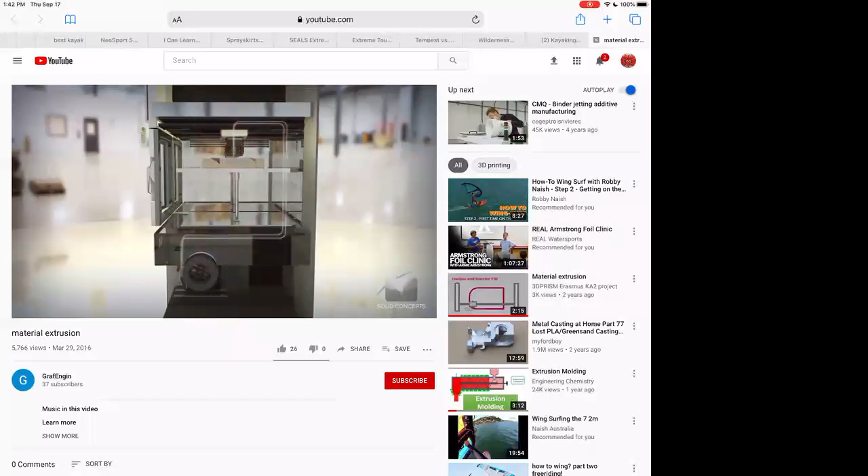The FDM process begins by slicing 3D CAD data into layers. The data is then transferred to a machine, which constructs the part layer by layer upon a build platform. Thin thread-like spools of thermoplastic and support material are used to create each cross-section of the part. Similar to a hot melt glue gun, uncoiled material is slowly extruded through dual heated nozzles, which precisely lay down both support and thermoplastic material upon the preceding layers.

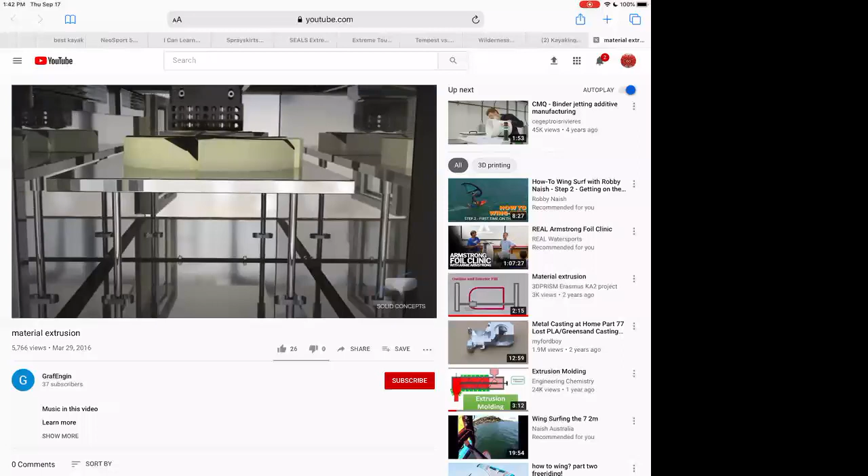The extrusion nozzle continues to move in a horizontal XY plane while the build platform moves down, building the part layer by layer. The finished part is removed from the build platform and cleaned of its support material.

Raw FDM parts have visible layer lines. However, service providers such as Solid Concepts offer multiple finishing options to create smooth, even surface parts, including hand sanding, assembly, and cosmetic paint. Since FDM parts are constructed with production-grade thermoplastics, including ABS, polycarbonate, and Ultem, they are both functional and durable. FDM is utilized in a number of industries, including aerospace, automotive, industrial, commercial, and medical.

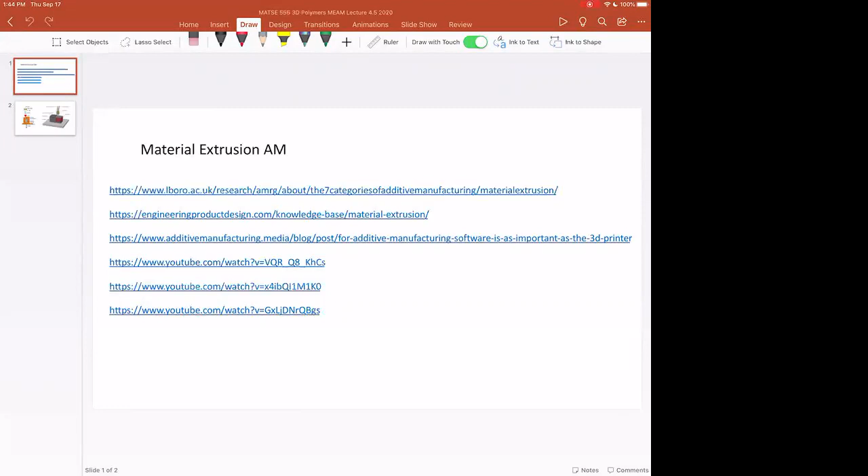And we'll do this for SLS, we'll do this for stereolithography, we'll do this for high-speed sintering and binder jetting and others. But if you haven't seen a 3D printer live, YouTube is a good resource. If the labs ever become public again, we have a lot of these printers in the labs, or you can ask one of your friends for a tour if we can get guests into the labs again. So I just wanted to make sure that everyone's on the same page.

And so the idea is that you have to build a three-dimensional solid part showing something like this, but you can only do it with this nozzle tracing each piece of the part and then having layer by layer buildup. And so you need to think about the different layers: layer 1, 2, 3, 4, etc. So we have layers.

And those are separated in time because you build one layer at a time. Then you build the second layer, then the third layer, then the fourth layer. So the whole layer is completed before the machine moves in material extrusion AM. But then you have roads that have to be put next to each other, and this is distributed in time as well. We'll talk about thermal cycling and how the temperature goes up and down in the part as it's made using material extrusion AM.

But this is quite a bit different, or completely different, than what happens in injection molding. It's a little bit the same as machining, as CNC machining, although that's a subtractive process from a solid block of material, not an additive process. But this idea that it takes time to build the part, that you have different layers built as a function of time, and then you're trying to build a solid object out of these roads, is something we all want to consider in the next lecture and a half as we talk about this.

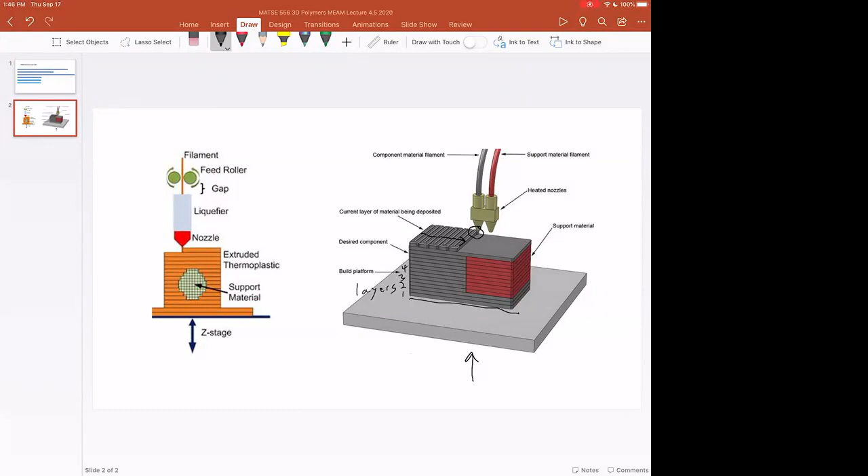Okay, so this is important thinking about this constitutive unit, because in order to get everything fused together, or in order to build our part out of these roads, we need to think about how polymers weld together and how polymers deform. So let me get my pen going here. So we have adhesion and deformation.

These are actually very related processes, but they have to do with the rheology and the response of polymers and composite materials to temperature over a certain time. And so what you're going to see over and over, and this will sound like a broken record, but this is how polymers work: the temperature is important, and the time over which that temperature exists, or the time over which the thermal gradient exists, is really important. And it has to do with the rheology of the polymer.

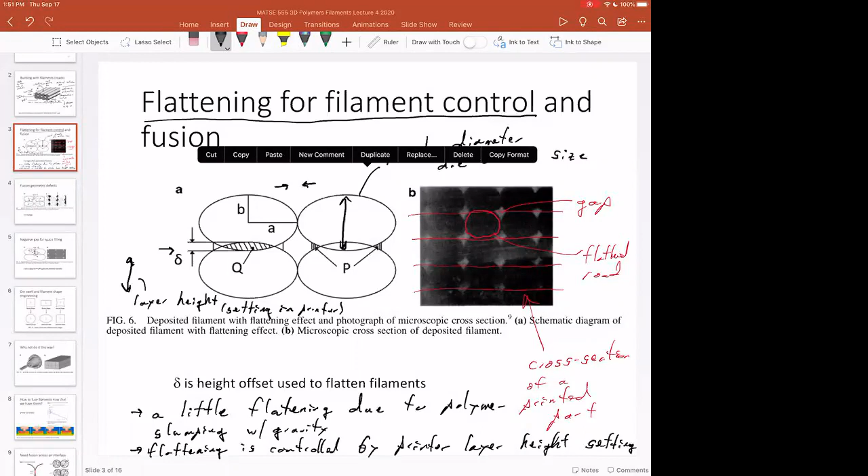Road spacing, which is 2 times A - so how spaced apart are the roads and how spaced apart are the layers? Those are machine settings that you can put into the software. But the result is that you have some delta, which is the overlap or difference between the extruded road diameter and the layer height. You can also have a parameter, I think they call this theta in the paper, or big delta, where you need to make sure the roads are close enough together, otherwise you get road to road gaps.

So in this diagram, the layer height looks good because we're getting good layer adhesion. But the road to road distance is bad because we're getting gaps between roads that are sitting next to one another.

This is really interesting, because now you would anticipate that if we pull in this direction, this is going to be a very weak part, whereas we've got reasonable strength in this direction because we have good layer adhesion. So from this microscopic view, you can tell right away that you're going to have issues in one direction of the part, and perhaps those issues will be mitigated in the other direction.

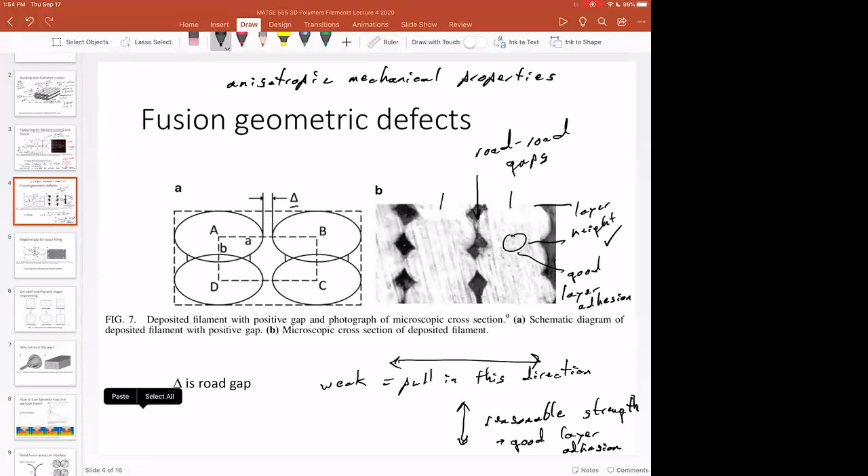And so we call this difference in properties anisotropy. This happens in all different kinds of AM, but now we can see where that anisotropy comes from. Not only do we have anisotropic building blocks, these roads we're using, but we also may have different fusion phenomena in different directions, which also introduces anisotropy. This is important to think about.

In lots of cases, the machine and the material are all set up, so the parameters are known - you just use the recipe the company gives you if you're using an off-the-shelf material with an off-the-shelf machine. But in the instance where you're trying to develop a process, test a new material, or come up with a really complex part and take advantage of this anisotropic property of 3D printing, this is something you as a scientist or engineer out in the field will have to think about and deal with.

And so doing mechanical property testing as a function of direction, doing microscopy - this is probably an optical micrograph.

I'm sorry, this doesn't have any scale bar on it, but we can go to the paper and see what the scale bar is. You'll have to do some optical microscopy to figure out where the defects are, but this is how you start to develop a robust process and get to know what's going on with your material as a function of the printing conditions.

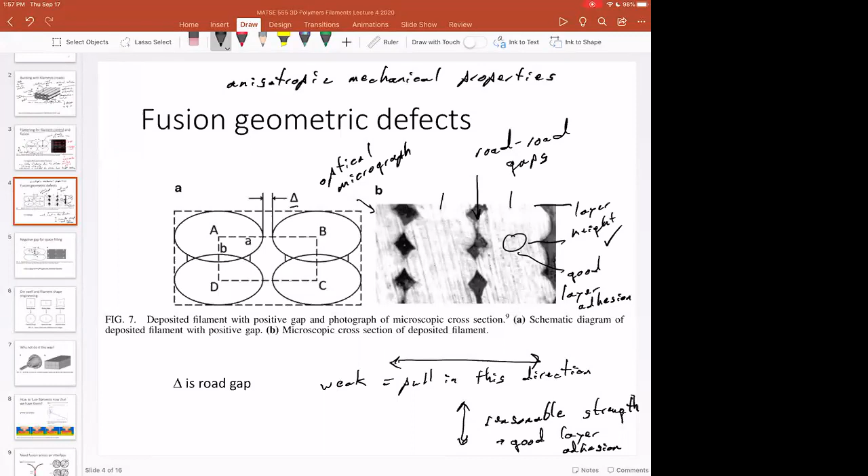As you roll this all together, you have a negative small delta, which is the layer height, and a negative big delta, which is our road-to-road spacing. You can decrease gap defects, shown right here, but you can't get rid of them. It's very, very difficult or nearly impossible based on this geometry to get rid of these gap defects. So there will always be small pinholes, which doesn't necessarily make the part not gas tight or not watertight. You can make a cup out of material extrusion AM and it holds water, or make a mask that acts like a solid piece of plastic.

But there will always be these gaps in there, and the gaps decrease the bulk density. That automatically decreases overall strength. If you put air into a material, its strength is naturally going to go down, and that's what happens in FDM. So oftentimes if you can get 80 or 90% of the ultimate strength of the material with material extrusion AM, you're doing a good job.

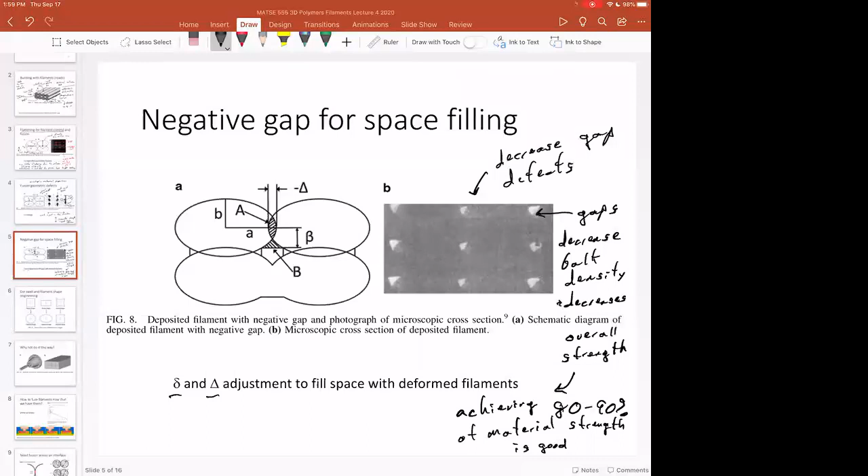So a rule of thumb is achieving 80 to 90% of material strength is good. You might have 5% void, and then some interfacial issues, which decrease the mechanical properties a little further. But there are papers out there that show you only get 50% of the intrinsic material strength, or 30% of it. If you get the conditions just right, though, you can really approach that intrinsic strength of the AM part compared to the bulk material. So you're doing a pretty good job if you can get the conditions optimized just so.

Now, it would be really nice if you could have different shaped filaments. It turns out that because of the viscoelasticity of polymers, you usually have a nozzle like this, and of course you get the usual filament shape. It turns out because polymers are viscoelastic, even if you have a square nozzle, you'll get a round filament shape because of the surface tension of the polymer.

Now you can make that ovalized a little bit, but if you play some games with the viscoelasticity of polymers, you can get filaments that start to approach something with better space filling if you have this sort of nozzle shape. This is called the Barus effect, but it's due to surface tension and viscoelasticity.

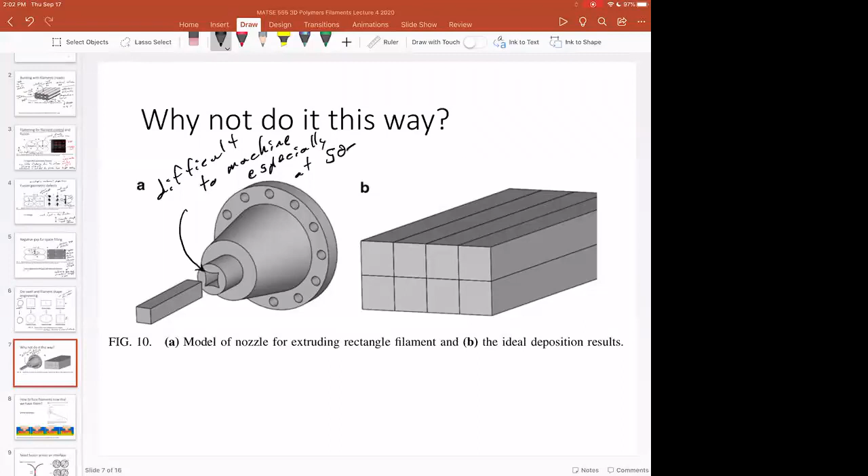Especially at 500 microns. And if you've ever looked at a nozzle from a 3D printer after you use it for a few hundred feet of filament, or if you have a composite filament where you have fibers or particles in your material and you're extruding it through that metal nozzle, you get a lot of nozzle wear.

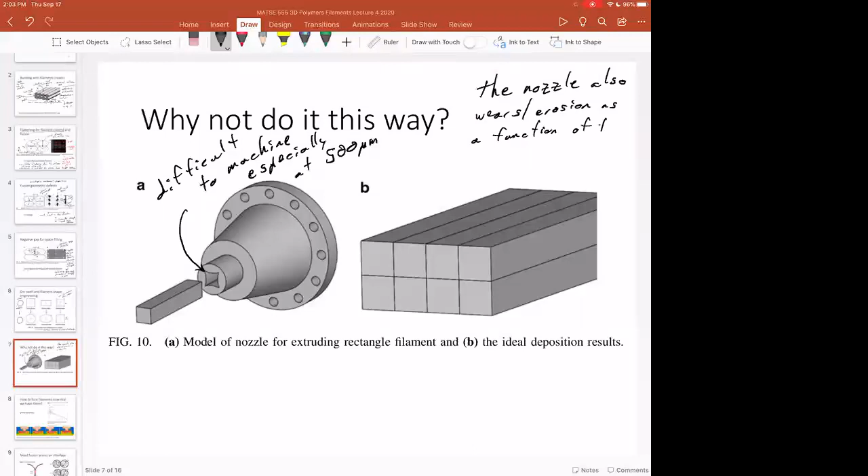And so the nozzle also wears, or it doesn't deform, it erodes as a function of time. I think I have some pictures of that in a subsequent lecture, whereas if you extrude a composite material for too long, you'll see the nozzle really start to change shape and erode because you're extruding solid chunks of stuff through the nozzle. So just like sandpaper, your nozzle can erode away.

But this is an interesting concept, and we'll see this isn't really commercial. This is just a paper saying what if. This is a really interesting concept where now you could get complete space filling if you could get square roads. So if you go work for a 3D printing company, you can introduce this idea.

Okay, I have a question here from Jivtesh. Can't we just 3D print a nozzle like that using... yeah, so that's possible. So the question is, can we print a nozzle like this using laser powder bed fusion of metals? And you can, but remember this diameter is small.

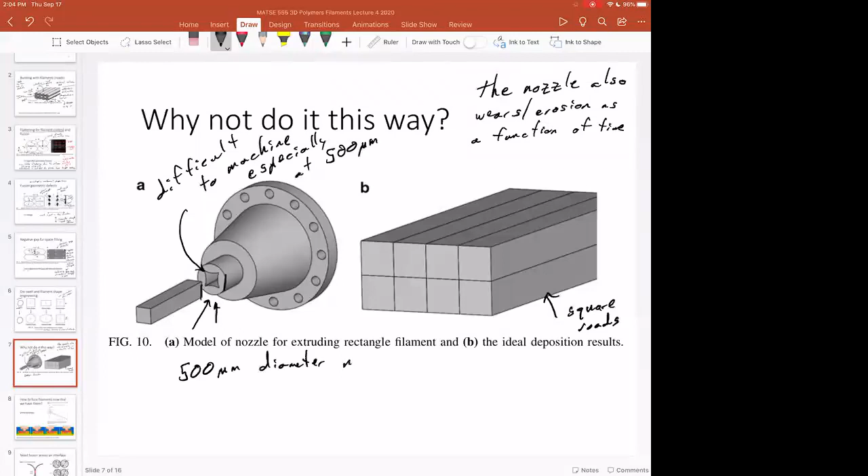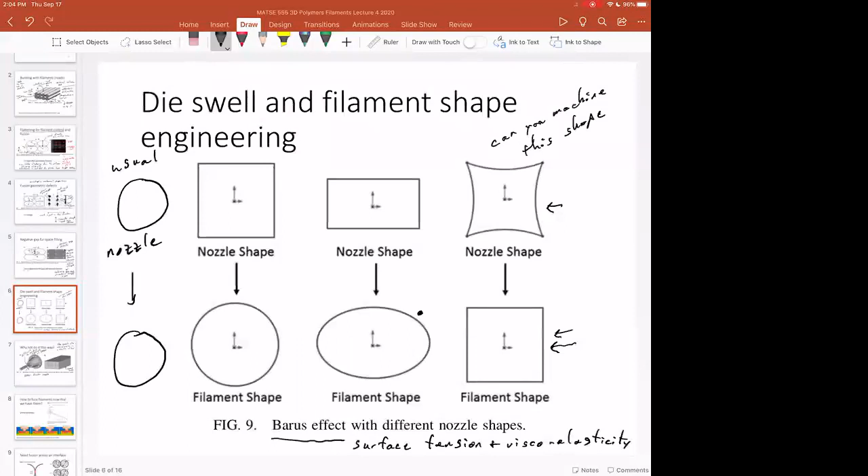So for sort of industrial scale FDM, this could be a 500 micron diameter nozzle, and that means that these corners are very small. You need some high resolution there, and you need to get the right curvature because the die has to look like this. For BAAM, they might use something like a 1-inch diameter nozzle.

And so there you're getting on the size scale that it might be possible to use laser powder bed fusion of metals to get that die made. But you'd have to look into the surface finish, you'd have to look into to see exactly what resolution you can get. So I think there's some more to do here, especially for larger material extrusion AM. But you know, it's easier to make these parts if they're bigger. So it's possible, but at these small scales, it's very hard to make.

And I don't know if anyone doing BAAM or some of these larger scale extrusion processes have looked at different nozzles, but that might be something, if people are interested in large scale material extrusion AM, that might be something they want to look into for one of their papers. Good question, Jivtesh. Any other comments, questions people want to make? Okay, so we'll move on.

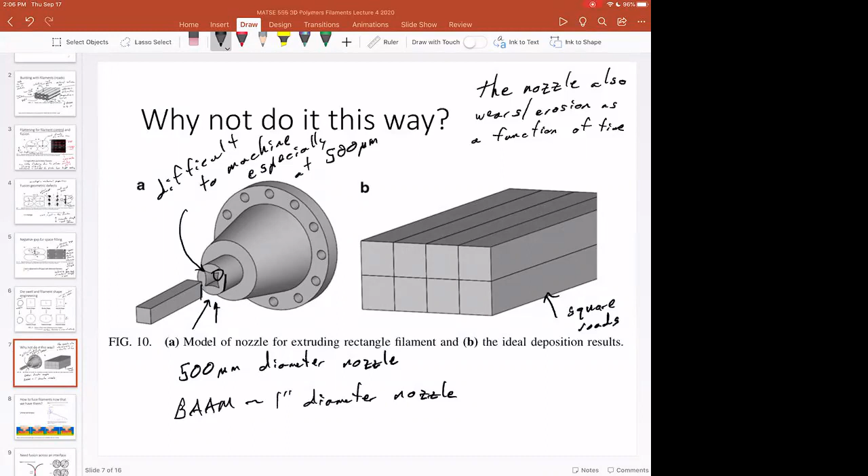So we've been talking about the shape of roads or the geometry, but we have to fuse filaments together in order to make our solid parts. So once you extrude a filament, once you have the blocks of material like this, or a part that looks like this, what is the actual molecular fusion process that's happening in order to get this fusion to occur?

And there's nice papers by Joe Bartolai and Tim Simpson. They're both at Penn State. And so they've looked at some of this polymer fusion, or this polymer filament fusion, in detail.

This is one cool plot from this paper down here, where this is the temperature cycling versus time. And so you can see just on the order of 35 seconds, you've got a temp that's about at 250 or 260. I think that's 260. Yep, 260. So this is about 260 degrees C.

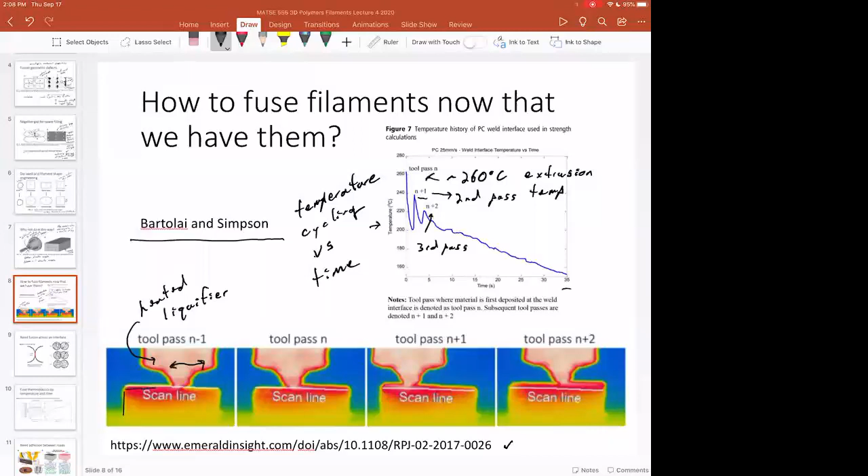And so this head, so this is our heated liquefier, and it's rastering back and forth across the part - that's the geometry. And of course, you can look up this paper as long as I think you're on the VPN. If you can't find a copy of it, let me know. But as you're scanning the scan head back and forth across the part, you're getting temperature spikes.

This causes deformation. This can cause warping, but also the repeated temperature cycling is what leads to the fusion of the layers, both layer by layer adhesion or interlayer adhesion, and then road to road adhesion as well. And we'll look at some more of this temperature cycling, because this is just material extrusion AM head that's going back and forth across the part. But you can imagine that this gets really complicated when you're making a three-dimensional part. And there's some really cool temperature profiles in the literature that people have published.

We'll get to those. So what's - I have a quick question, sorry.

Yeah, go ahead. Yeah, so the tool pass N-1 is prior to the material being extruded, correct?

I think that is prior to the data being taken, but I'm not exactly sure. Maybe they warmed up the part with the tool pass, but it doesn't look like they're building a road with the N-1, I'd have to read the paper in detail. It doesn't look like a road is being built from what they've outlined in the other thermal cameras, and they don't show the tool pass N-1 in the temperature profile. So I think they basically deposited a part, got the camera set up, warmed up the part a little with tool pass N-1, and then started depositing material. But I'm not 100% sure.

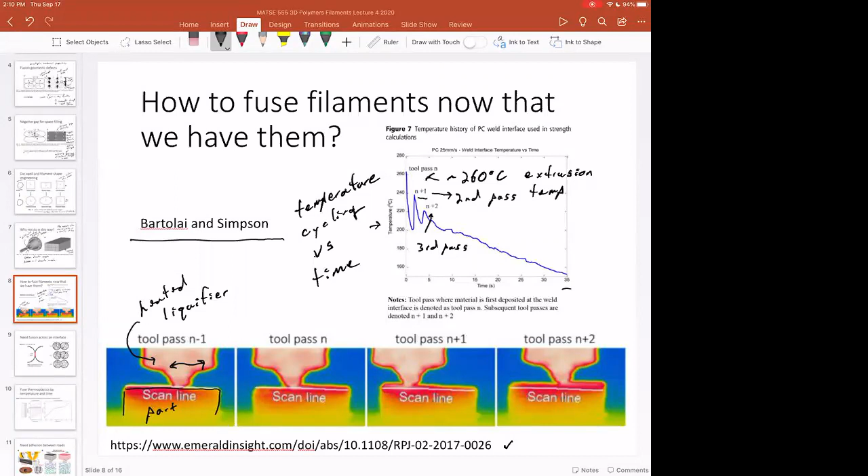Okay, makes sense. Thanks. Yeah, but the point is that they're getting temperature cycling, and the temperature doesn't just start high and go low. You see this temperature going up and down, and this happens a lot throughout the part. This is important for polymers and composites because the only way to stick two roads together is to get chains interdiffusing across this interface.

So you're not going to be able to see that, but maybe you'll see this. So you must have polymer chains that must diffuse across the interface of roads to have adhesion. Otherwise this is a very weak interface.

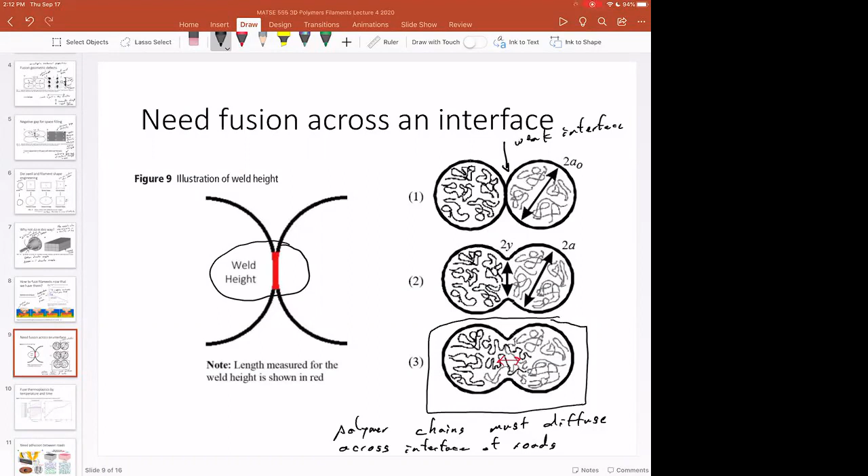Because there's no polymer chains spanning that interface. We'll talk about this coalescence and how surface tension works in this, but the physical picture is, in order to make this weld, as they call it, you need chains to diffuse. And the only way to have chain diffusion occurs at high temperatures and long times.

Let me clarify that high temperature is relatively high. For some polymers, that's only 100 degrees Celsius. For other polymers, that's 300 degrees Celsius. And long times is also qualitative. For some polymers, it's a second. For other polymers, it's much longer, 10 minutes or more. And we get that time temperature superposition.

So let me just write that down. We get that data from rheology. So we fuse thermoplastics by going to higher temperature and going to longer times. And so this plot looks a little different from what you've seen before, but if you look at the axes, modulus and frequency, we've looked at modulus versus frequency plots before, and so this is a rheology measurement.

So this is long times, and silly putty is very soft and flows like a liquid. This is the physics of how all polymers work. You can think of this diagram as two bouncy balls of silly putty. If you bounce them together quickly, they don't adhere, but if you push two balls of silly putty together very slowly, you can get them to interdiffuse because those chains start to diffuse around.

This is a bit esoteric in terms of polymer physics and chain rheology, but it's the only mechanism you can use to get chains to stick together and get roads to stick together. Otherwise you have to resort to an engineering solution, like putting glue between the layers—there's a paper on that in your reading—or doing something else at the interface to help it fuse.

I know this will be very new to some of you, but if there are any questions or clarifications people want to bring up, you can do it now, because this is really how we understand melt processing and road adhesion in these material extrusion AM parts. Any questions?

Okay, well this is something to study, and I think a couple of the papers in your homework are on this, so make sure you at least take a look at all the papers to get familiar with the titles, so you can select the one you want.

The problem with time-temperature superposition is that there are limits. We can't heat up polymers to 1,000 degrees C and get them to fuse quickly, and we can't wait 3 hours for our FDM part to fuse, because we'd like to do 3D printing rapidly. So we'd like to process at low temperature and fast times, and both of those things work against us in FDM. But fortunately there are some tricks.

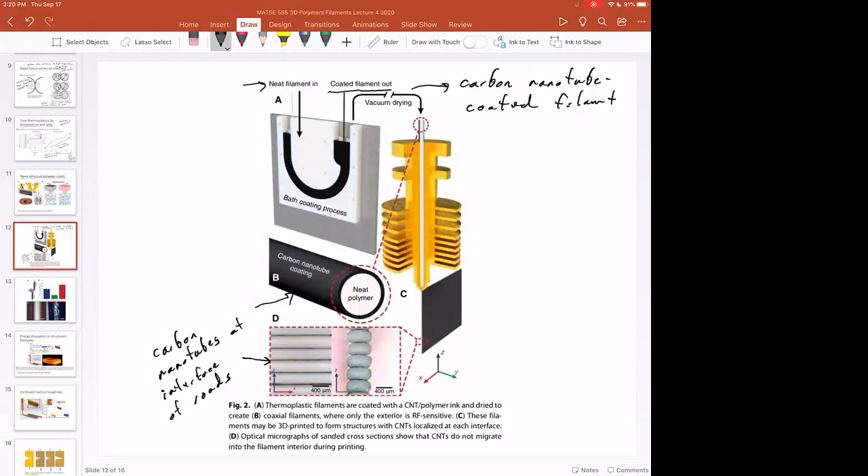These are interdiffusion of polymer chains, which makes the part strong. We know that now. So what the microwave heating does is it acts on the CNTs and causes heating at the interface.

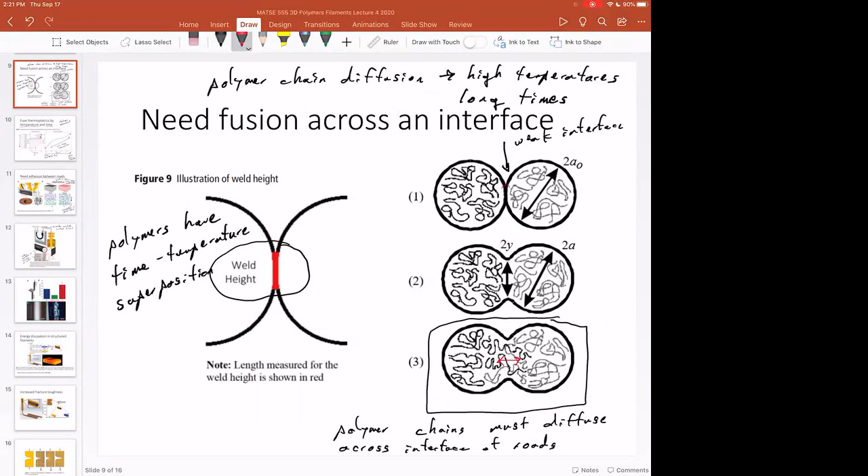So if you need to make all these interfaces strong, and if you heat only right where the CNTs are, you can get this interdiffusion to happen. And that's exactly what they did in this nice paper. They had to do a lot of things to make that happen, namely coating their filaments in carbon nanotubes, but this is a demonstration of localized heating causing strengthening of the part at all these interfaces.

This stack of roads should look familiar to you. The idea that you need chain interdiffusion between roads to get high strength should start to become part of your thinking about material extrusion AM. Then it's just a matter of the engineering and technology to get us to the physical situation where we have good interdiffusion, which leads to a strong part.

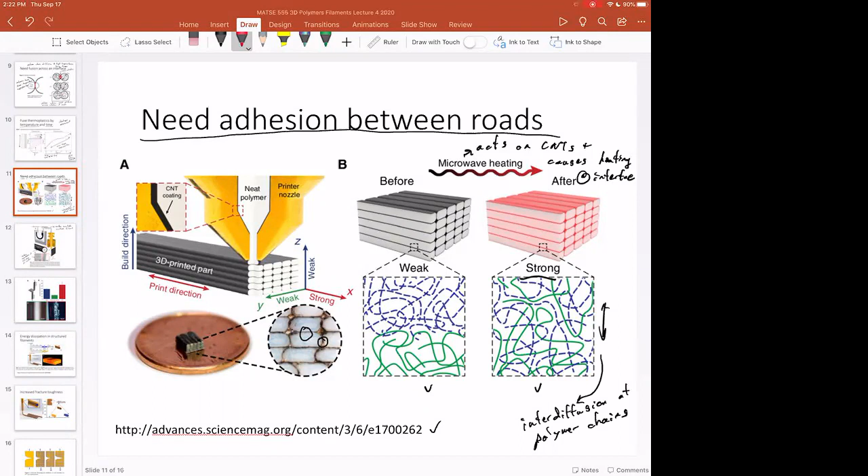So here you're going to have poor interfaces.

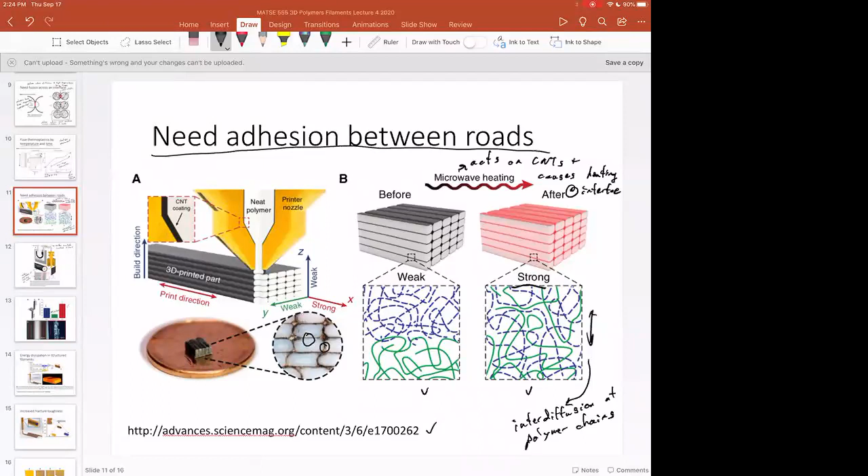With their microwave RF process, they're able to really increase the interfacial strength, and they're putting nanotubes in there, which might help increase the fracture toughness further. This is an interesting paper because they talk about a technology, and then the fundamentals that technology addresses in terms of what's happening with the polymer. It's a nice example of connecting a solution to the physical situation of chain interdiffusion, which is the connection we want to make in this class. How do the materials behave? What's going on in a composite or polymeric material, and how does that relate to whatever additive process we're talking about?

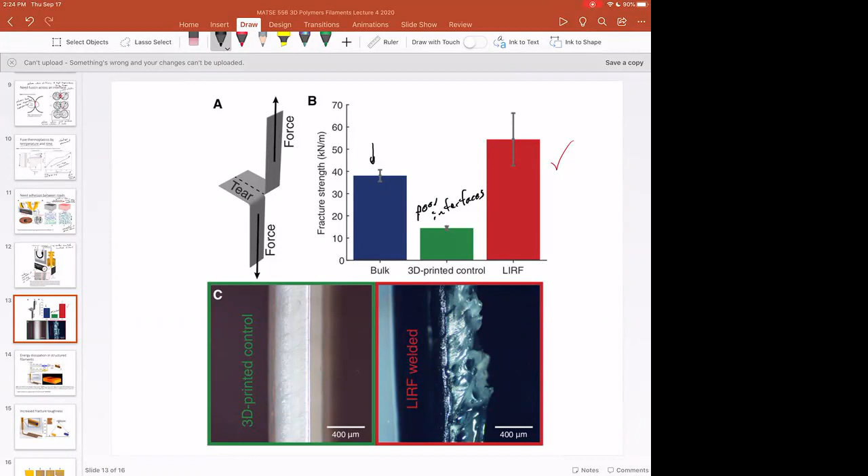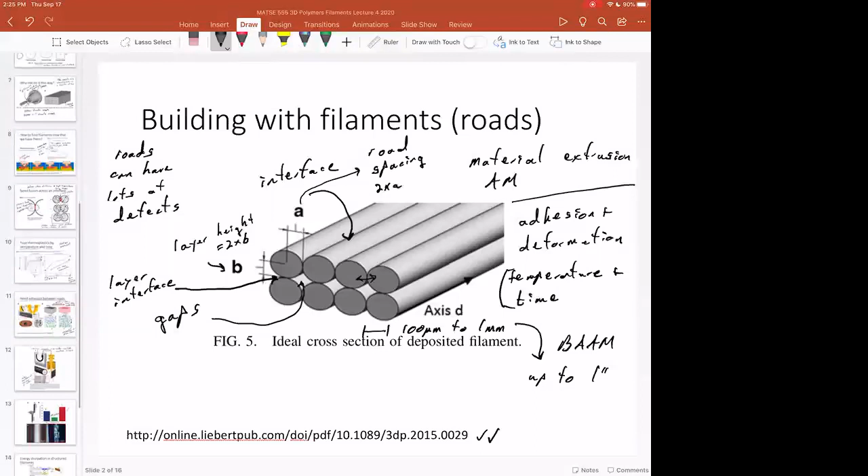I don't have the slides in this presentation, but we will talk a little bit about part design. I know some of you are interested in making engineering parts, like making parts with specific dimensions, or for aerospace, or parts that have certain strengths in certain directions. So I think we'll spend half a lecture next time not just looking at fracture strength, or theoretically what parts might look like coming right out of the 3D printer, but on how you might design and print a part.

There are other classes in the AMD sequence that go into this a lot, like toolpath, software, everything else. We won't do all of that, but if you're curious about different software packages, or interested in the engineering design of additively manufactured parts, I can point you to those resources. We're going to try and keep with our charter of discussions about materials and additive, especially polymers and composites. But if you're missing something in the additive picture that you want to get, let me know, give me a heads up, or ask questions on the discussion board on Canvas, because there are lots of knowledgeable additive people in the class, so they'll be able to pipe in, or I'll pipe in as well.

Okay, any questions or comments? All right.

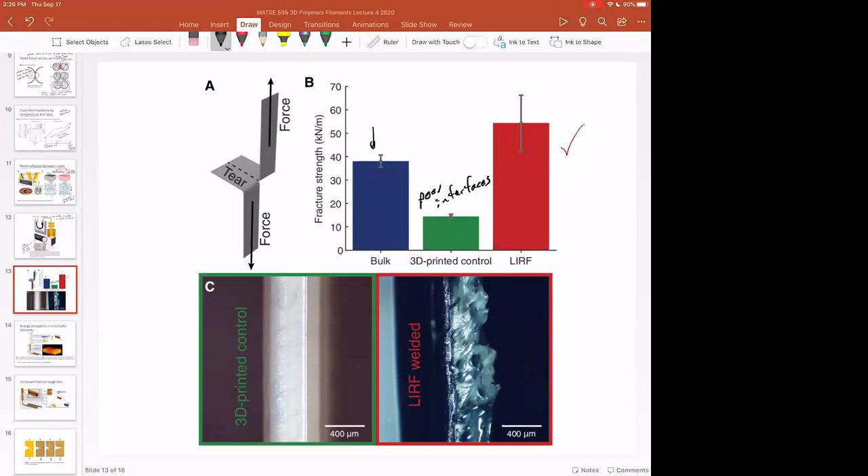So another thing that we can do with filament adhesion and also toughening is this really interesting paper by Professor Vogt, who's in the Chemical Engineering department at Penn State, and some of his papers are online for your homework if you want to take a look at it.

What they used in this paper is a core shell filament, and they did some really nice CT scanning, which we'll talk about in a second. This core shell filament uses polycarbonate as the core, and polycarbonate material is strong, but it's hard to fuse. Polycarbonate is a high viscosity material with a high melting point, so it takes a long time to fuse that filament together.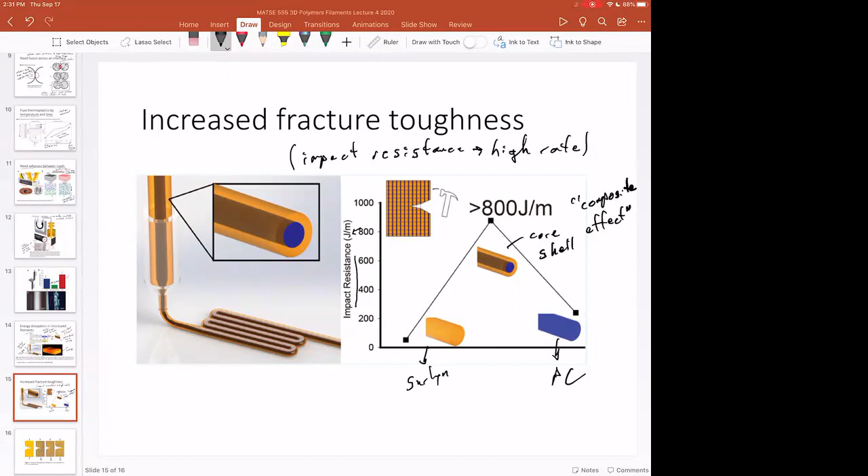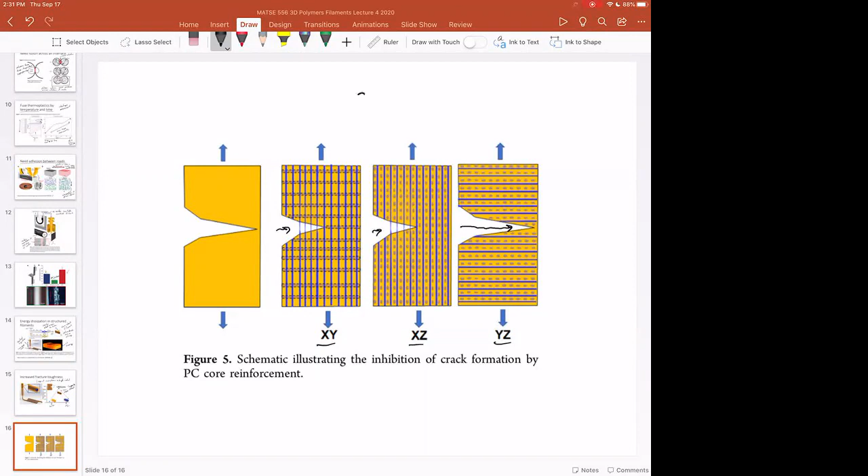There's really interesting stuff going on if you look at the anisotropy of this part, where in some geometries you have threads of polycarbonate spanning the crack, versus if you're going right through, you don't have any threads of polycarbonate spanning the crack. You have anisotropy in fracture toughness due to road alignment.

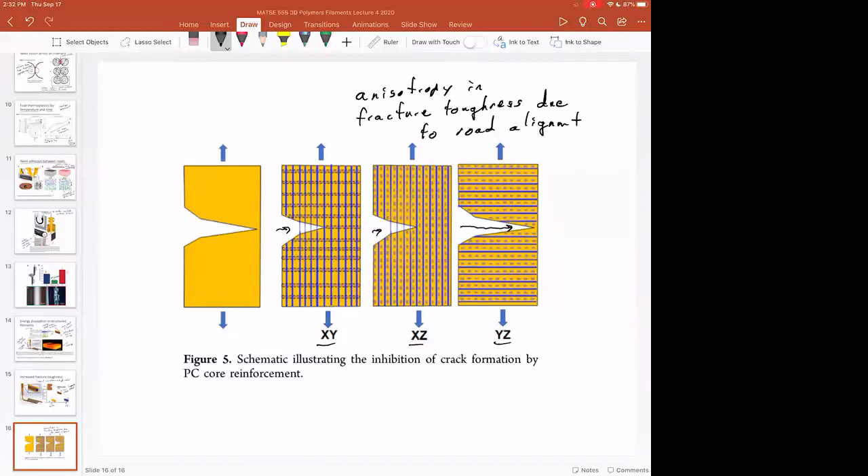That's interesting because of how this is printed. It's printed in a regular FDM style printer, so you can never get threads of polycarbonate spanning the Z-axis. When you look at the YZ plane, because you have layers in the Z direction, you can never get threads of polycarbonate spanning from layer to layer. So your fracture toughness is always going to be lower in that direction because you're not fracturing any of these polycarbonate threads as the crack propagates.

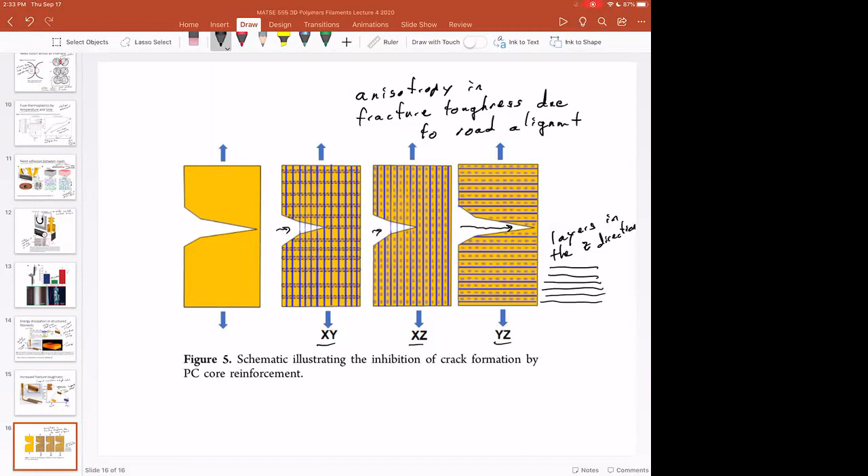So that's just some really interesting things you can do with road adhesion, and some really interesting things you can do with composite filaments.

We're going to clean up a couple things in terms of characterization, because I've had a couple questions on that, and a couple things on part design.

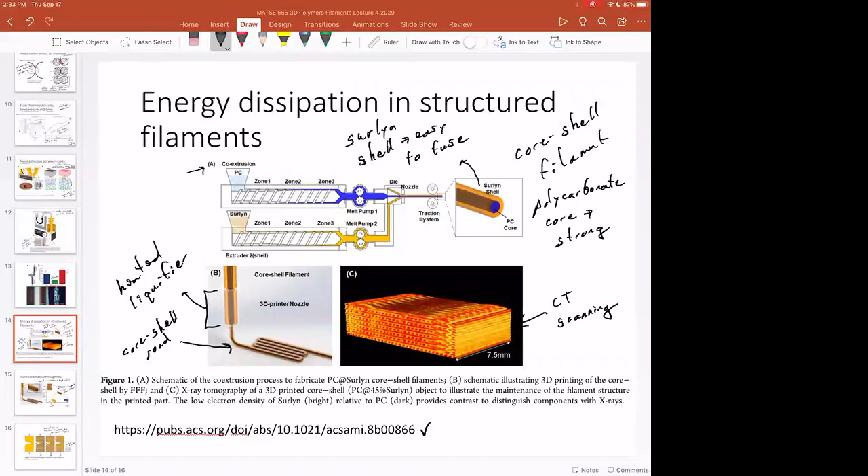Then we're going to move on to another additive process that doesn't necessarily involve melt rheology, although we're going to keep melting in mind, or at least keep this time temperature superposition in mind, because we're going to use thermal energy to fuse powder when we get to powder bed fusion. Jivtesh used this acronym L/PBF, which stands for laser powder bed fusion, usually used in the context of metals. But the physics of laser powder bed fusion of polymers is different than the physics of metals, because the melting physics is different. So this idea of viscoelastic polymers and time temperature superposition is something we're going to have to keep in mind for powder bed fusion of polymers as well.

Polymer powders are different than metal powders. So even though the process might be called powder bed fusion in both cases, there's much different things going on. We need to keep this melt rheology idea in mind as we move forward and talk about the different processes throughout this course. Any questions on this?

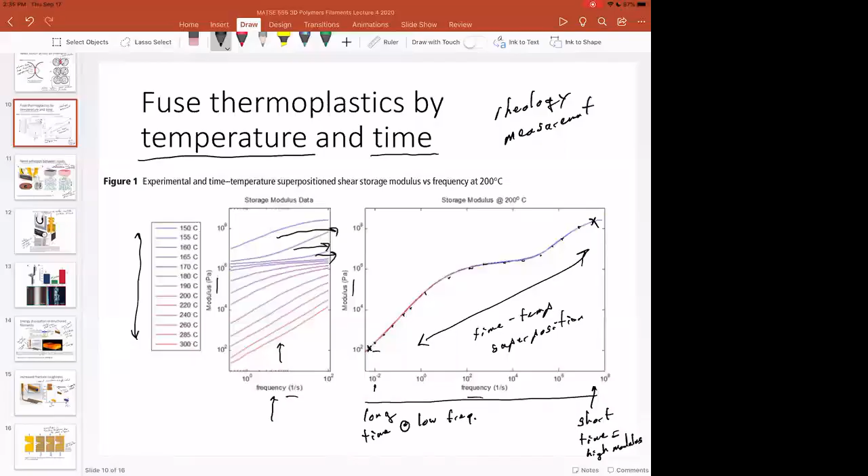I have just a couple of slides to finish off this lecture on characterization, because as we start talking about different processes, we're going to talk about different characterization techniques. We've already talked about them with Jensen's question on fracture toughness, and we talked about CT in the last paper. I want to make sure we have a working knowledge of these different characterization techniques, and hopefully if you have a favorite technique or something you want to learn about, you'll be able to pick papers for the homework to enhance your knowledge there. I just want to give you a couple slides to make sure we're all speaking the same language when it comes to characterization, or at least have a common frame of reference.

We've talked a lot about rheology. Whether it's viscosity as a function of shear rate, or viscosity or modulus as a function of frequency, you should have this in your arsenal to talk about it. Sometimes people will want to report viscosities, sometimes they're going to want to report G prime or G double prime, so you should know what those things are.

The modulus is a property of a static material. We could think of the modulus of steel, or the modulus of this polymer. The Young's modulus is the slope of the stress strain curve at low strain. That's one definition we should keep in mind.

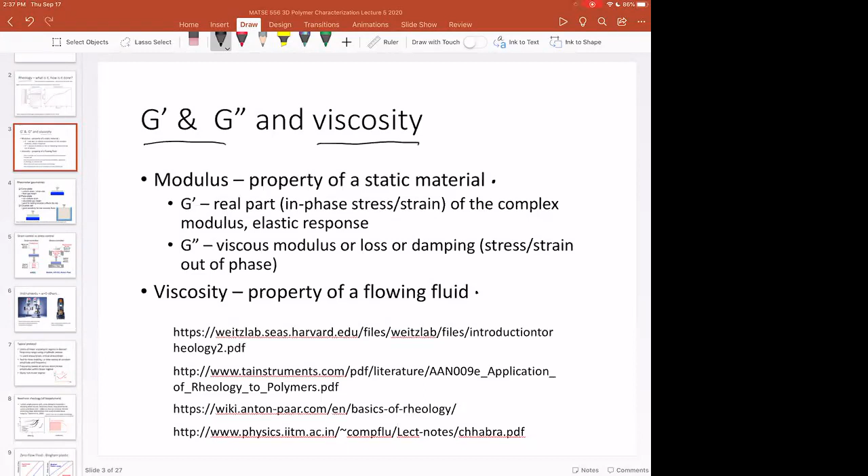The cone and plate is interesting because it's got uniform strain or uniform strain rate, because as the gap changes, the radius changes as well, and that's why it's a uniform strain.

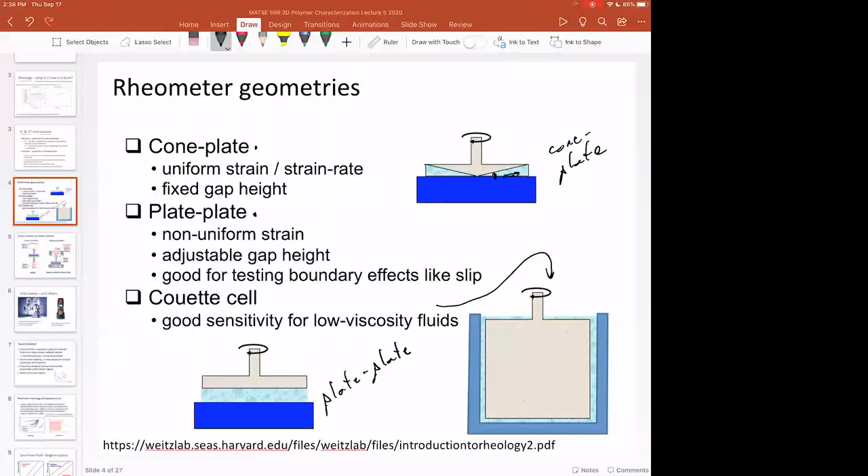So anyway, these are some of the terms. And then if you buy a rheometer, you can buy a strain controlled rheometer or a stress controlled rheometer. And so there are differences in these two instruments, and you just need to know which one you have.

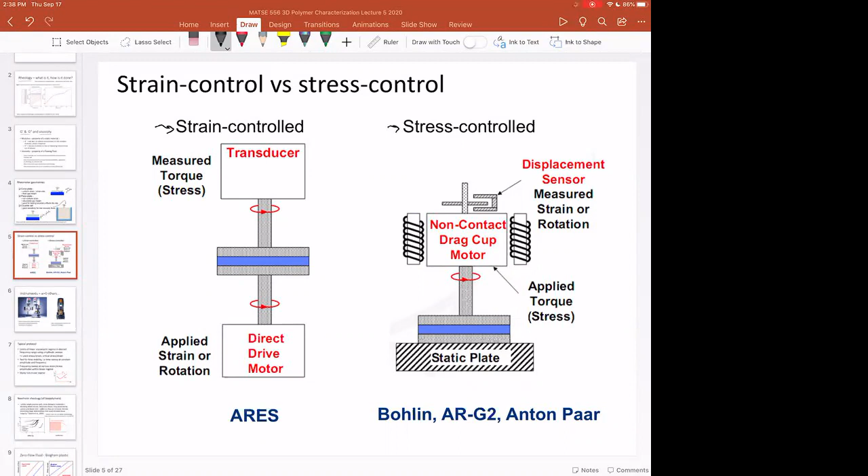But the software of the rheometer takes care of a lot of the math, unless you want to do the math by hand. I'll give you references in future slides if you want to study how to convert between viscosity and modulus, or discuss the details of strain-controlled or stress-controlled rheometry, depending on how much of a specialist you want to be.

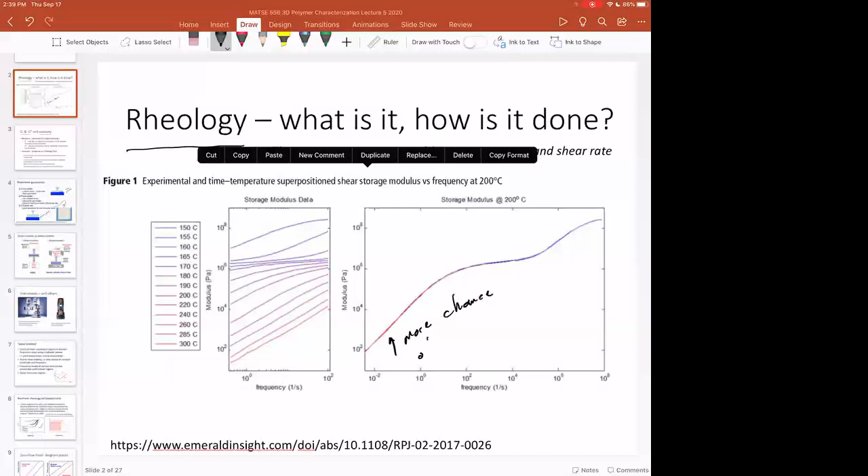But the rheology data and using the rheology data is what we want to talk about in this course. For instance, we're going to have more chance of road fusion here versus difficult to fuse polymers up here.

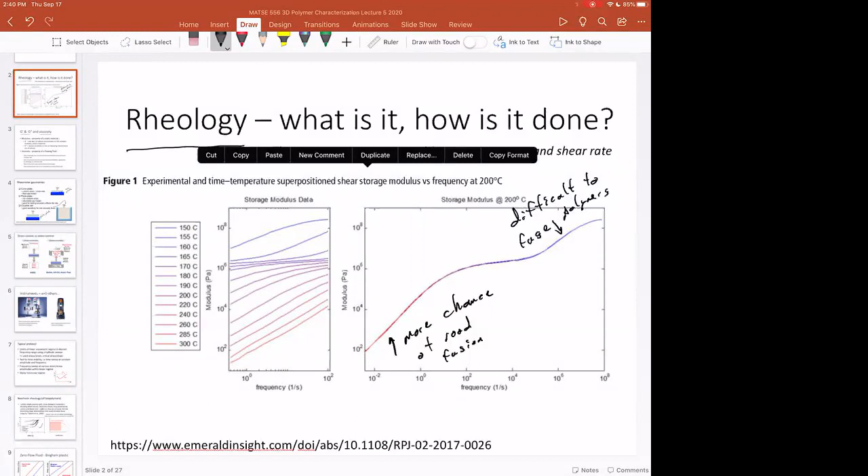But what we don't have right now is, you must have a modulus of X to get road adhesion, or you must have a viscosity of Y in order to have success in additive manufacturing. It depends a lot on machine parameters, cooling, details of the polymer, molecular weight, all of that stuff. And that's where the expertise in running the machine comes in. So I don't have an equation to give you that will allow you to predict the modulus you need for success in the process, but this gives you some of the fundamentals for what you should think about when you start to attack whatever additive manufacturing process you're interested in.

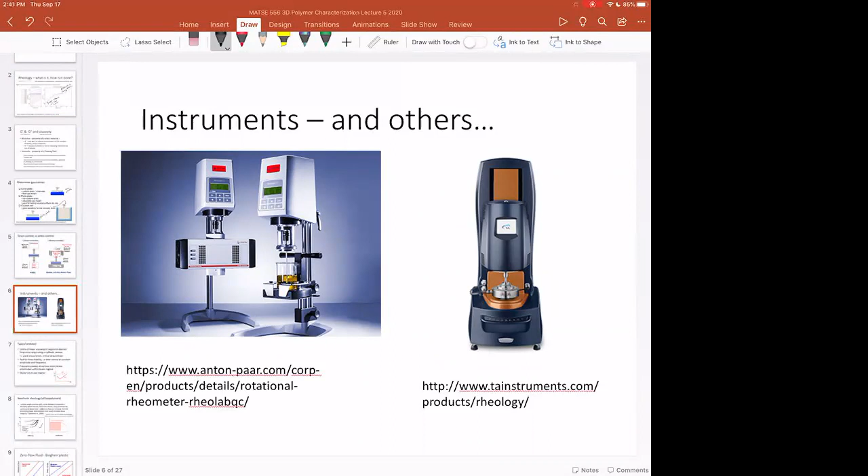Okay, so the machine helps you construct the data, and then you can use the data to really understand your additive manufacturing process. And so the typical protocol is that you want to do some rheology measurement.

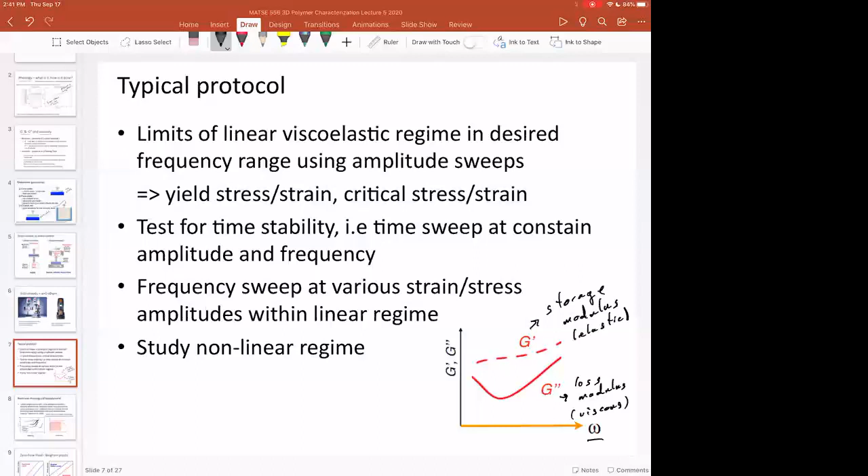And so you make sure that you're within the time constraints, or within the time window that gives you a linear response. You make sure you're in the right temperature, all of that sort of stuff.

And one really interesting thing that happens is that as a function of your strain, it's cool that biological materials show stiffening as you strain them. So that's interesting, because if you try and pull on skin, skin looks and feels very soft and easy to deform when you just pull it a little bit, but you actually can't break it because of this stiffening effect. So natural materials are designed that way, to yield but not break.

And so this is just an interesting aside, and doesn't have a lot to do with 3D printing necessarily, other than this shear thickening or this strengthening of a material can get really difficult if you want to 3D print it. Because of course, if something gets stronger when you try and shear it, that's an issue. So you need to think about what are these different relationships.

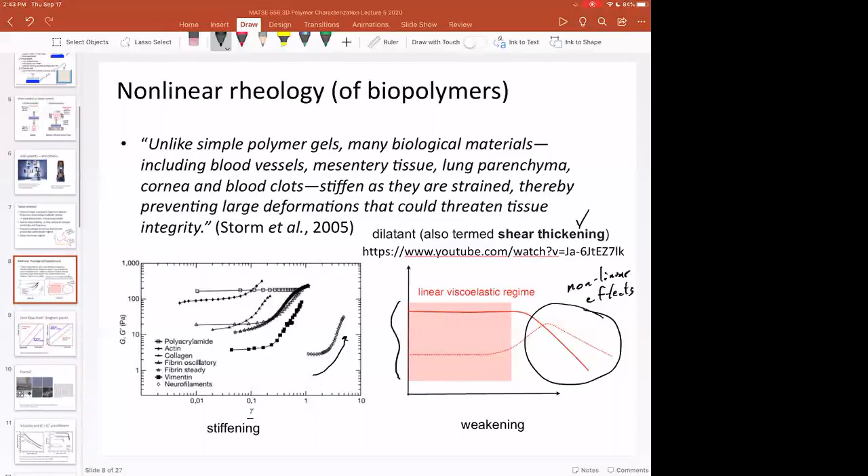We'll talk about shear thinning in a second. That actually helps us process polymers. But some of these rheological terms are things that you should be familiar with.

The other thing that you should be familiar with is this idea of a Bingham plastic, or a material that can support a yield stress at zero shear rate. So what this means is that you can deposit a road and it won't flow.

So this material, if I can spell material, won't flow when it's at rest. And so that seems like not a big deal for a cold piece of plastic, right? If I have a cold piece of plastic, it's just going to sit there. Of course, it's not flowing.

You can think about right when the material comes out of the heated liquefier, it's above its glass transition temperature. And so if it doesn't have strong Bingham plastic material behavior, you could have a lot of slumping, a lot of deformation in your part that you don't expect, other than this idea that you have a material that supports a yield stress at zero shear rate.

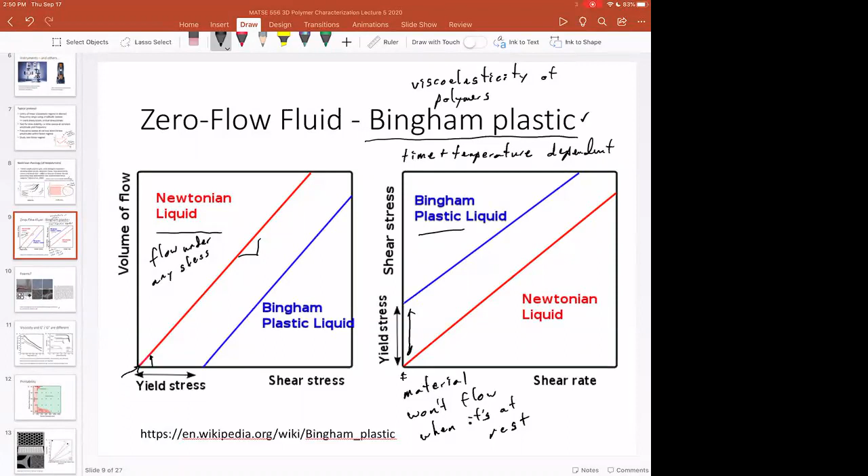So we're going to look at a couple papers by Professor Lewis because she's got some really nice rheology data in her papers that goes along with some of the direct ink writing that she's going to do. So this is direct ink writing, which you know is a subclass of material extrusion AM. And so you don't need to run this under thermal conditions, but some of the concepts that she illustrates are important for our discussion on rheology.

So any questions at the end of lecture here? Any other comments?